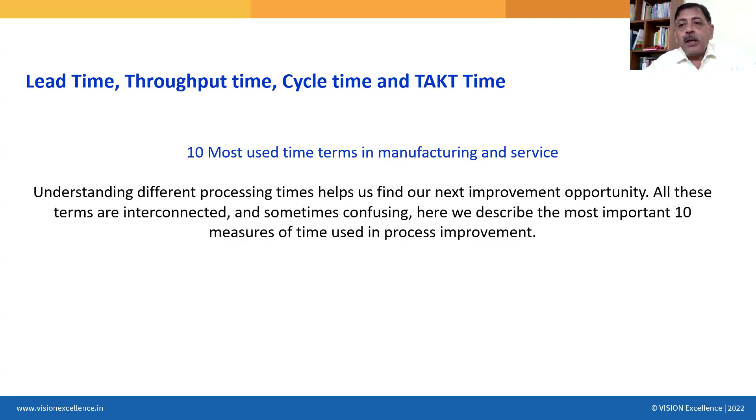Let us try and start. I will start with the very basics, and then you will realize that we are getting into some relatively complex but highly important terms. So the first is understanding the concept of open time and available time. We are starting very simple, and I will need help from some of you.

Maybe Rangaraj sir, I will need your support here. Suppose my factory opens at 9 a.m. and I close at 6 p.m. For how many hours am I open? 9 a.m. to 6 p.m. - that's 9 hours, 3 hours before 12 and 6 hours after 12. So 9 a.m. to 6 p.m. means my factory is open for 9 hours.

So what is the open time, Praveen sir? The open time is 9 hours. Okay, so Ajay bhai, my factory opens at 9 a.m., closes at 6. Open time is 9 hours.

Please also note that I already know and declare that I will be closed for half an hour for planned maintenance time - I will not be producing any sellable goods during that half hour, and also closed half an hour for lunch, where I will also not be producing anything worth selling. So that's 1 hour I already know about, and based on this understanding, I plan everything, because this is what I already know and have communicated to my whole team.

So out of these 9 hours, Ajay bhai, how much is the available time? 8 hours. Everyone clear? Show me thumbs up, who all are agreeable with this? Although I'm open for 9 hours, since I already know that the planned maintenance time is half an hour,

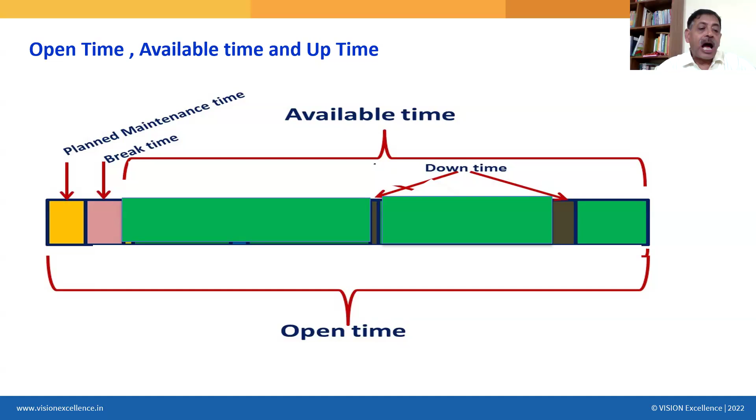So out of the total open time of 9 hours, the available time was 8 hours. And since downtime is half an hour, obviously uptime is 7.5 hours. So this is where the uptime is, this is where the downtime is. And as all of you have confirmed that you understand that the uptime is 7.5 hours.

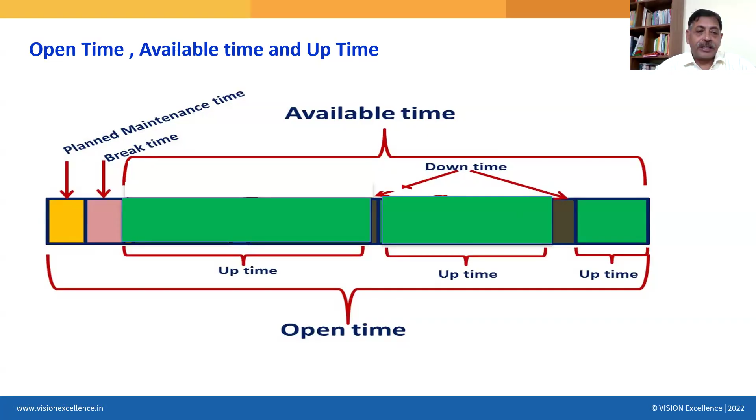Now within this uptime also, there will be some time where I know that I will not be producing anything that is worth selling. Some time is lost in setup every day. It is not a downtime. You know that you are going to heating, maybe pre-processing time.

So you set up that, right? Your chillers will come, bring the machinery to a particular temperature. Your AC burners bring the temperature to a particular level. Your air compressors will be operating and creating that particular amount of pressure in the air vessel. So, my dear friend, this yellow box is my setup time.

Unavoidable, but present. And also we realize that we will not be able to produce anything which is worth selling in this time also. And these blue blocks, my dear friends, are changeover times. Please realize that all the lean practitioners believe and agree that this setup time as well as this changeover time, although non-productive, is part of the uptime.

Show me a thumbs up who now realize that this is what the definition is, right? So for quite some time, there was a debate. Certain practitioners said that this changeover time and setup time shall be considered as downtime, but ultimately a consensus kind of emerged that although they are non-productive, they are within the uptime.

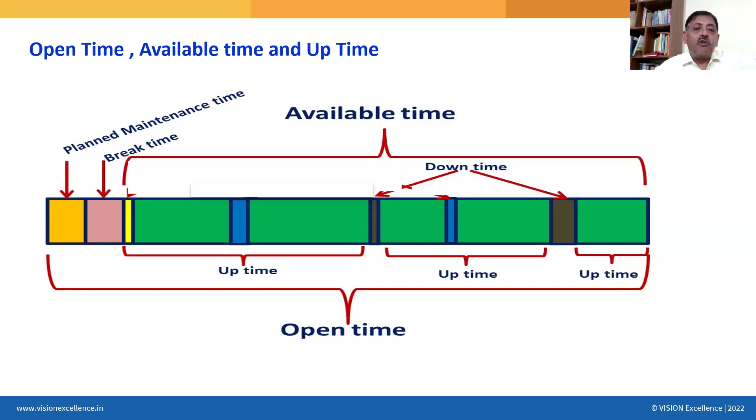Angaraja sir? Yes, sir. Shweta ma'am, show me a thumbs up if that is clear to you. So now we have understood 6 distinct definitions about open time, available time, uptime, downtime, setup time, and changeover time. This is the visual that is helping us.

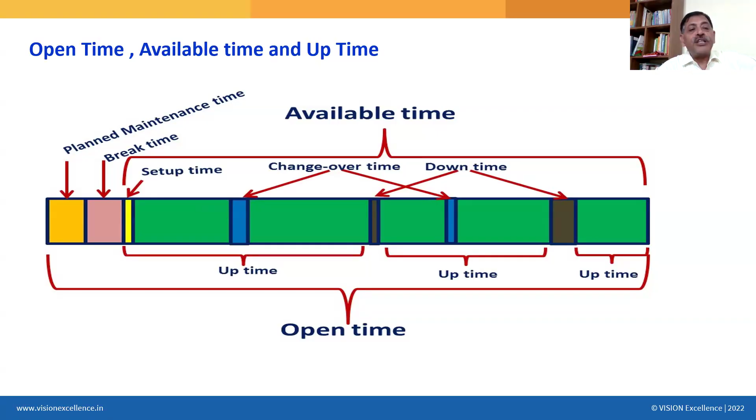So what is the open time? The official work hours, including the break time and the planned maintenance time. What is available time? It's the open time, excluding the break time and the planned maintenance time. Thangaraja sir, can you help all of us read out these 2 definitions? What is open time? What is the available time?

Open time, the official working hours, including break time and planned maintenance time. Available time, it's the open time, excluding break time and planned maintenance time. Yes, and please continue with the downtime. Downtime, the period of time in which a process is not functional due to unplanned events. Unplanned event. Yes, please emphasize on the unplanned event.

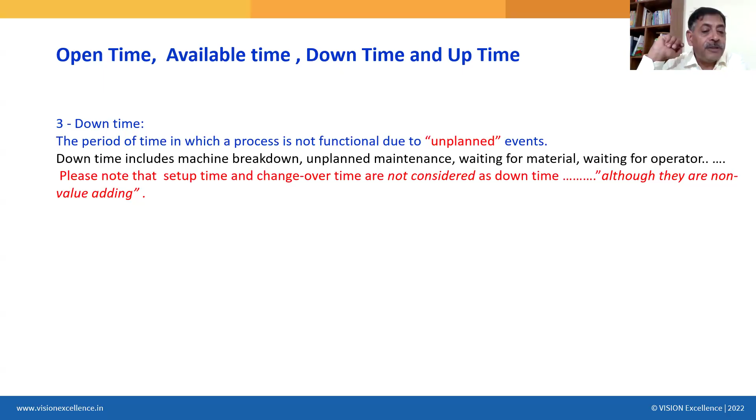We do not plan these. Please continue, sir. Downtime includes machine breakdown, unplanned maintenance, waiting for material, waiting for operator, etc. Please note that setup time and changeover time are not considered as downtime, although they are non-value adding. Show me thumbs up who all are agreeable with this. This is how the definition has been set up.

Now, uptime, the time during which the process is ready to perform its intended function. It is opposite of downtime, and therefore, by definition, it includes setup time and changeover time since they are considered as value enabling activities. Uptime obviously is equal to available time minus the downtime. Now, what is the setup time? The time required to prepare a process to be ready to function or accept a job.

Setup time is usually needed once a day at the start of the shift. For example, starting the operating ovens, setting up the chillers and air compressors, etc. It typically happens only once a day.

What is the changeover time? This is something very important. I would need help from Ajay Bhai to help us explain the definition of changeover time.

Changeover time is basically when we are changing the SKU or changing the parts, the total machine setup is done, so that we can produce a different set of product. When you're moving from one SKU to another SKU, that is a changeover.

I would like you to read out the definition because this has a very important message here. The time required to prepare a process to change product. Typically, time duration from producing the last good piece of the last product run to producing the first good piece of the next production run.

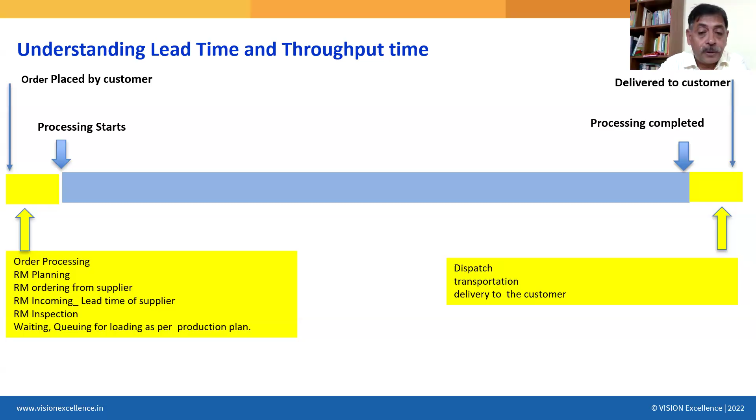So if you want to reduce the lead time - and why would you like to reduce the lead time? I will come to that in a couple of minutes. If you want to reduce the lead time, the best strategy is to reduce the throughput time. Show me a thumbs up if all of us are agreeable with that.

Now this brings us to the question, why would you like to reduce the lead time? For that I will ask a question to Natarajan sir. Natarajan sir, you want to purchase a book. Yesterday I told you I'm coming up with a book and the name is going to be Navigating to Success. And let's say after 3 months that book is available on both Amazon and Flipkart for the same price.

You go and check at Amazon, it says it will be delivered in 2 days. You go to another service, it says it will be delivered in 3 days. You go to Flipkart, it says it will be delivered in 4 days. Which service provider are we going to choose? Whichever is earlier only - yes, whichever is delivering earlier.

In other words, the service provider which has the smaller lead time. Therefore, my dear friends, lead time is, in today's day and time, the make and break feature of a business. Only those businesses are going to succeed which have smaller lead time, because typically the cost, the price, is dictated by the market.

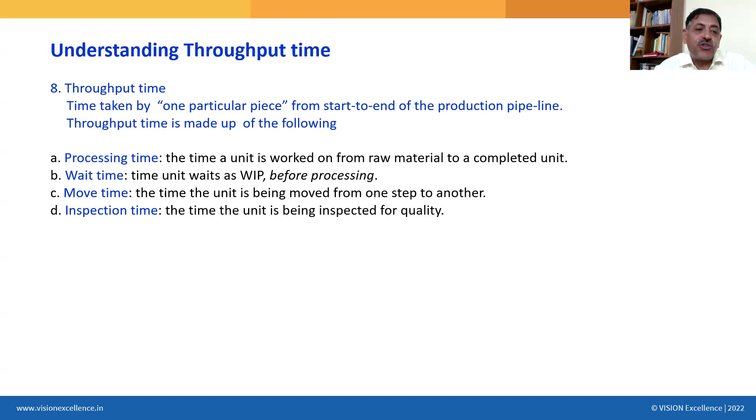Think of one particular piece. It starts moving from one end of the production pipeline. Sometimes this piece will undergo processing at machine number 1, then it will wait in the bin between machine 1 and machine 2, then take some time to move from the bin to machine 2, then spend some time on machine 2, and so on. Finally, it will spend time getting inspected. So typically these four components - processing time, wait time, move time, and inspection time - the piece will undergo.

Now that chapter is closed. Now opening a very different chapter: cycle time. Unless you give 100% attention, there is a big possibility anybody can get confused between throughput time and cycle time - these are two completely different things. Is everyone clear on throughput time? It is the time taken by one particular piece moving from one end of the pipeline to the last end of the pipeline. So that chapter is now closed.

Now opening another chapter: cycle time. Cycle time is the time required by one particular process to contribute to producing one piece of the product. It is the characteristic of the process stage. Cycle time describes your process's rate of output.

For example, if the rate of output is 60 pieces per hour - say this drilling machine, turning machine, stamping machine, or cutting machine produces 60 pieces per hour - that is the rate of output. In other words, I can say the cycle time is 1 minute per piece. So these two are related; rate of output can be expressed in terms of cycle time.

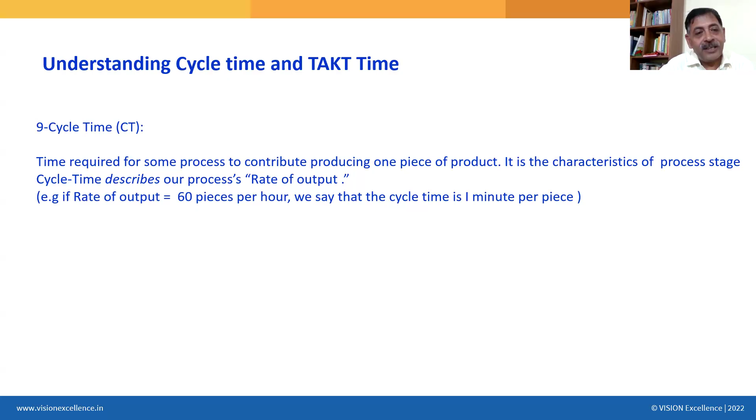Now, what is takt time? Takt time is the third concept, and it is dependent on demand. It is the rate, the speed at which your customer wants you to produce. Whether or not you can meet your demand is a separate question. But takt time can be completely determined even without knowing anything about your setup or your machine, because this is completely defined by what the customer demands.

Now, let us try and visualize, it will become very simple for all of you. Please come on camera. This is something very interesting and can be quite confusing if you are not 100% immersed into the discussion. So this is how typically a process happens. There is operation 1, this is my manufacturing pipeline. Ajay bhai? Yes, sir. Praveen bhai, this is my Ramachandran sir. Suvarna sir, this is my manufacturing pipeline.

This is how operations typically happen: there is operation 1, then goods will be waiting in the WIP bin, then they will be moved to operation 2, then waiting in the next WIP bin, then moved to operation 3, then waiting in the WIP bin for inspection, and inspection happens. This is how a typical manufacturing setup typically is. I request all of you to please come on camera, this is something very, very interesting. Okay, perfect, I can see a lot of people now, wonderful.

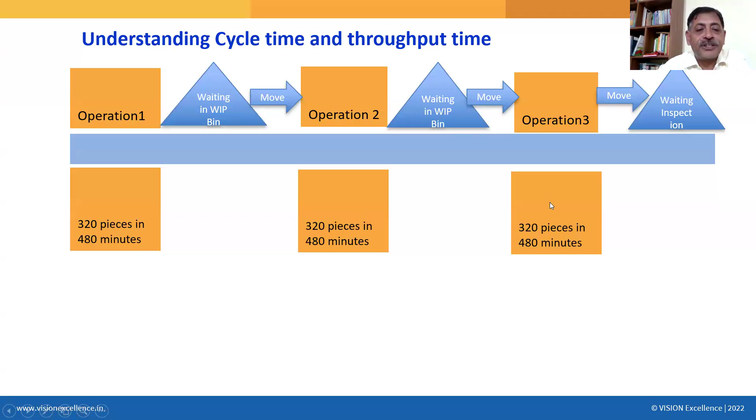Now let us assume there is a WIP bin. I have designed my process in such a manner that this WIP bin is for 50 pieces. Now let us play a small game.

It is very, very simple, child's play. If this machine throws out one piece every 1.5 minutes, how much time will it take to fill this bucket of 50 pieces? 50 multiplied by 1.5. 75. Yes, very correct, very simple, child's play. So how much time will it take to fill this bin?

And I move this bin only when it is completely filled. So one piece, every piece, is spending 1.5 minutes here, and it is spending 75 minutes here in this bin.

Yes, and we can convert how many seconds are there. Then it takes 20 seconds to move there. I can have another situation also.

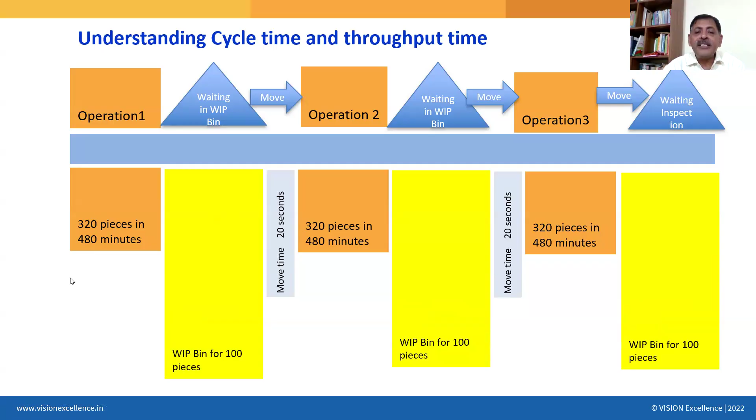Maybe I can decide that instead of 50 pieces, I will have a bin for 100 pieces. I can decide that, it's possible. But I have decided I will have this bin for 50 pieces only. So this is the set. This is how the setup is.

So the cycle time here is 1.5 minutes, because the rate of output is 320 pieces in an 8-hour shift, for 480 minutes. Cycle time for operation 1 is 1.5 minutes, that is 90 seconds. That is, every 90 seconds the operation produces one piece. Please show me a thumbs up if all of us are following this simple concept.

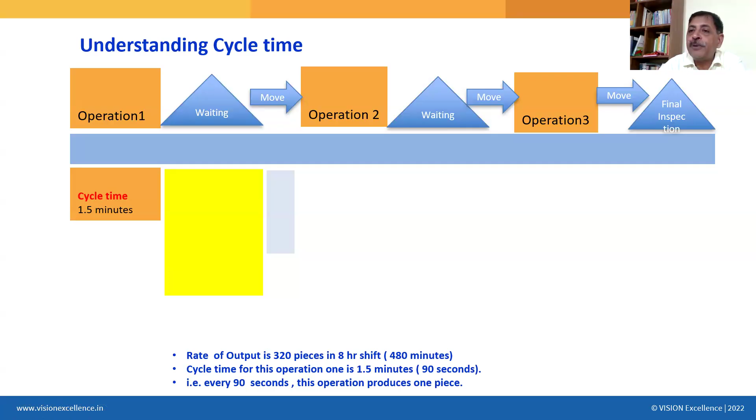Okay, now the WIP bin is for 50 pieces. It can be for 100 pieces also, whatever you decide. I am intentionally showing you this to demonstrate how these WIP bin sizes affect things, and what they do not affect. For the moment, just know I can decide to have a WIP bin for 50 pieces, or 100 pieces, or 200 pieces, or 20 pieces, whatever.

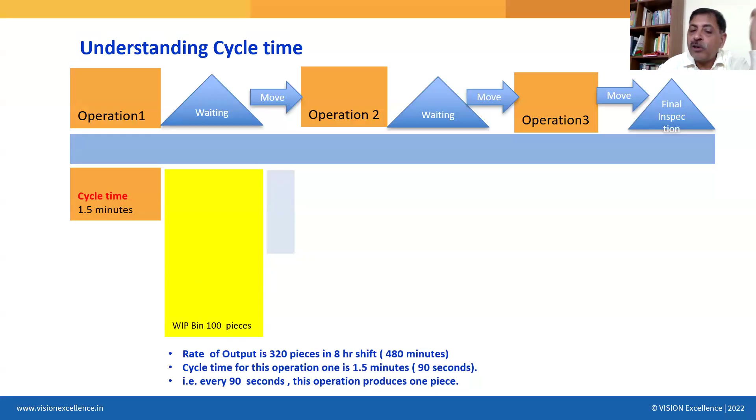For the sake of simplicity, in this example, the cycle time for operation 2 is also 1.5 minutes, and so on. So this is how one particular piece is going to spend its time.

Let's calculate the throughput time for one particular piece. What are we going to calculate? Throughput time. What is throughput time? The time it takes for one particular piece to travel from one end of the pipeline to the last end of the pipeline.

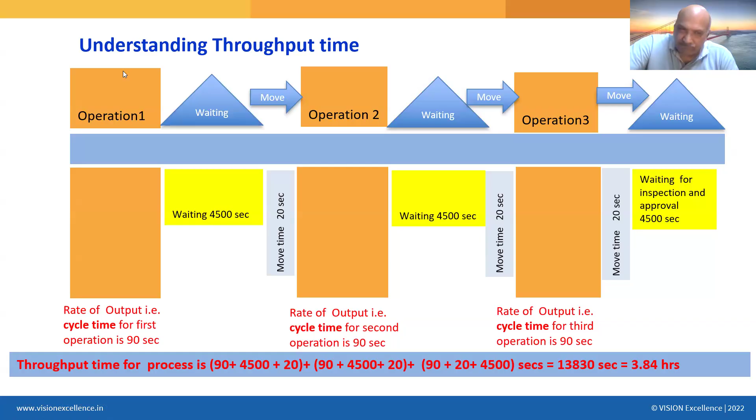So this particular piece will spend how much time here? 1.5 minutes, 90 seconds. How much time will it spend here? 75 minutes, which when converted is 4,500 seconds. So 90 seconds it will spend here, 4,500 seconds it will spend here, 20 seconds it will spend here. Again 90 seconds here, 4,500 seconds here, 20 seconds here, and so on.

Can you help me calculate? 75 minutes multiplied by 60 is 4,500 seconds. So if I want to calculate the throughput time for one particular piece: 90 plus 4,500 plus 20, which equals 4,610, and this is happening thrice, so totally 13,830 seconds, which is 3.84 hours.

One piece will take 3.84 hours for moving from this point to the output point of my production pipeline.

Show me a thumbs up if this concept is understood. Shall I repeat? Very simple. So, my dear friends, this is how I calculate the throughput time.

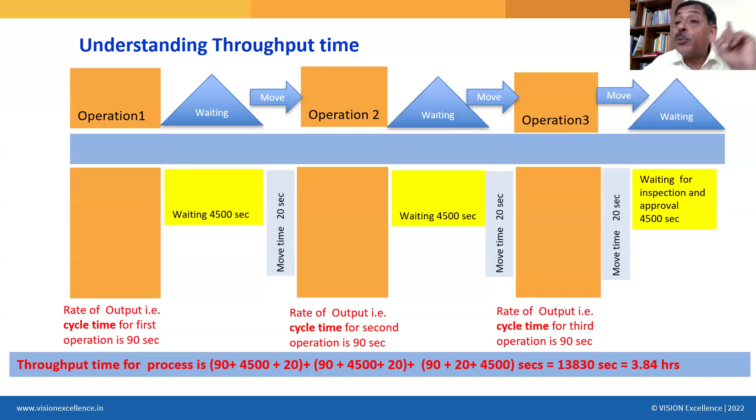Okay, so now coming back to my core presentation. My dear friends, now all of us are agreeable that we want to reduce the bin size for the sake of reducing the throughput time. Please show me a thumbs up. And please also note that this bin size has got no impact, none at all, on the cycle time. Correct? Is that clear? There are other ways, other strategies, other ideas we can use to reduce the cycle time. We will definitely want to increase production, reduce the cycle time, but that is a different story altogether.

Okay, now coming to this. Let me see how much time the piece is actually getting worked upon, and all the other time is a kind of resting, idling, or waste for this particular piece. This particular piece is being worked upon only for these 90 seconds. Only this 90 seconds, yes, not here. It is just waiting here also, nothing is happening to it. So 90 seconds here, 90 seconds here, and 90 seconds here. These 90 seconds thrice, that is exactly what your processing is happening. Fact number 1.

So processing time is 90 seconds plus 90 seconds plus 90 seconds, 270 seconds only. Also, third concept: if this machine is throwing out pieces when the pipeline is full, now assume the pipeline is full. After 2 hours, let's say the pipeline is full. This machine is throwing out one piece every 1.5 minutes. This bin is also throwing out one piece every 1.5 minutes. This machine is also throwing out one piece every 1.5 minutes. This bin is also throwing out one piece every 1.5 minutes. Your last bin is also throwing out one piece every 1.5 minutes. So if you look at the output side of your production pipeline, it is throwing out one piece every 1.5 minutes.

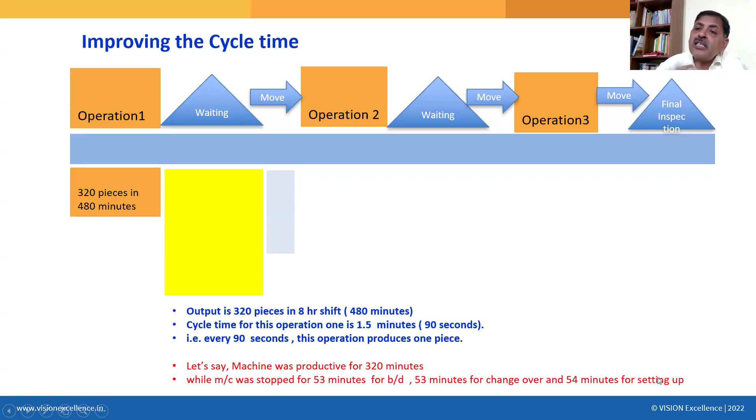I looked at this machine, I studied this, and I observed that this machine was productive only for 320 minutes, while the machine was stopped for breakdown for 53 minutes, 53 minutes for changeover, 54 minutes for setting up. So actually this machine was working only for 320 minutes. And if I think about it, for every minute it was working, it was giving me one piece. Unfortunately, it was not working because of the breakdown, because of changeover, because of the setup - that time was lost.

So if I want to increase the output from this machine, what shall I do? Very logical - shall I try and eliminate the changeovers? Shall I try and eliminate the breakdowns? So suppose if I am able to make sure that this machine is having no breakdowns, no changeovers, then the output will be increased. Yes, then maybe for every 480 minutes, it will be giving me 480 pieces.

Yes, and therefore cycle time will be improved. So for improving the cycle time, when I say improving the cycle time, it means reducing the cycle time. For improving the cycle time from 1.5 minutes to 1 minute, what shall I be attempting? Shall I be looking at the bin size? No, bin size has got nothing to do with it. What has got to do with this is the breakdown time, the changeover time, the setup time. We will have a look at this. So very simple, look at this.

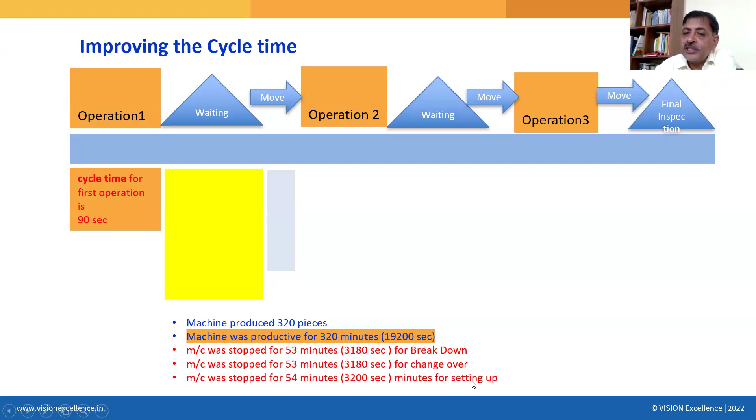Cycle time for this operation, in this particular case, is how much? This machine produced 320 pieces. The machine was productive for 320 minutes. The machine was stopped for 53 minutes for breakdown. The machine was stopped for 53 minutes for changeover. The machine was stopped for 54 minutes for setting up. So the meaning is the machining time is only 320 minutes, and in this machining time, the machine produced 320 pieces. So as far as the machining processing time is concerned, it is taking only 60 seconds per piece.

Ajay sir, Praveen sir, Sir. Suvarna, Naresh sir, Natarajan sir. Yes, machine processing time is 60 seconds per piece. And for every piece, 10 seconds, let's say this is for the sake of simplicity, 3,200 seconds. Right? Sir.

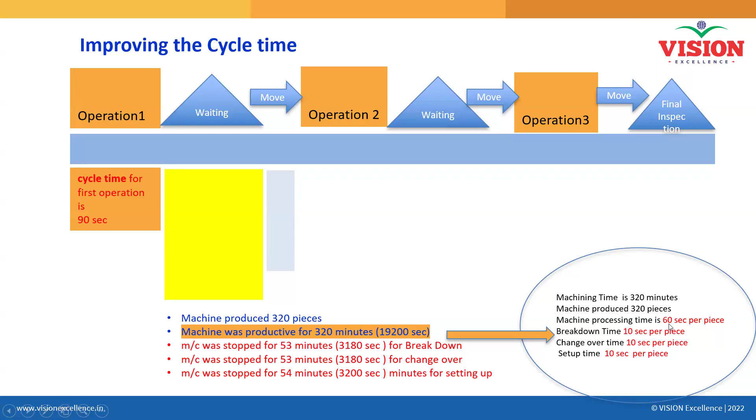10 seconds per piece it is. 10 seconds per piece are lost in breakdown, 10 seconds per piece are lost in changeover, and 10 seconds per piece are lost in setup.

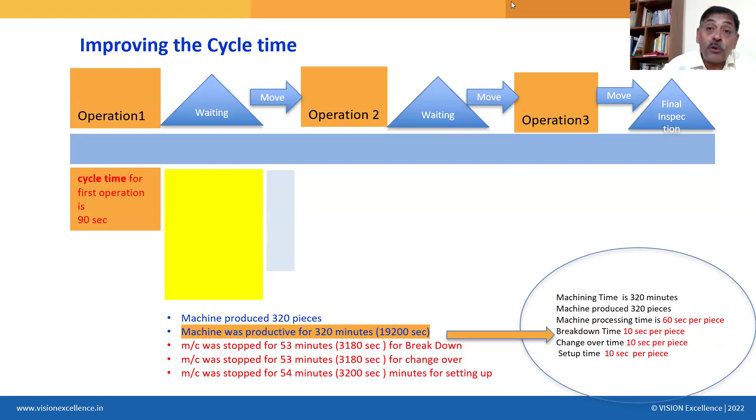And therefore, sir, the question is: for a system, either in FMCG, how many shifts' output should be checked ideally? Ideally, you need to monitor for 3 days, 3 shifts, 9 shifts, and then only you will have an average understanding. Because every shift, the same amount of breakdown will not happen. But if you monitor for, let's say, 9 different measurements spread over 3 days, or spread over 9 days if you are working only one shift, then it gives a kind of representative picture.

So how much is the typical changeover time? How much is the typical breakdown time and so on? So now we have realized, my dear friends, a very interesting fact: if I want to improve, that is reduce the cycle time, I shall be focusing my efforts on reducing the breakdown time, reducing the changeover time, reducing the setup time.

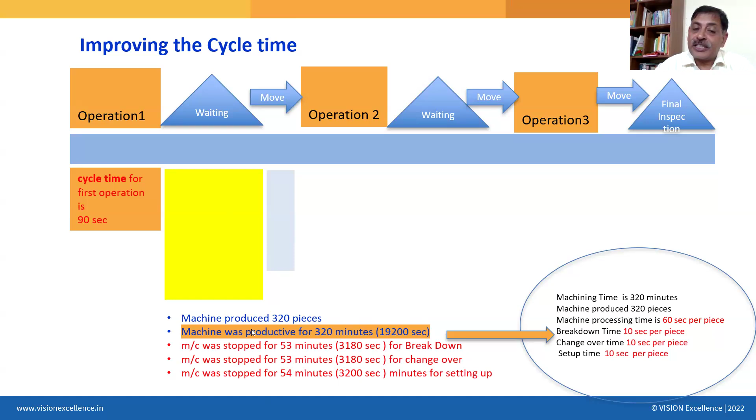Is that clear? And if I want to reduce my lead time, that is throughput time, I shall be focusing on bin size. So it will improve the cycle time also. Cycle time is getting impacted only because of these things, yes, only these things.

No, it is not at all affected by the bin size. I'm not talking about bin size, I'm talking about this operation. If we remove this breakdown, changeover, and setup time, then cycle time will improve, and parallelly our throughput time will also improve. It will also be reduced, but very marginally. You will see, very marginally.

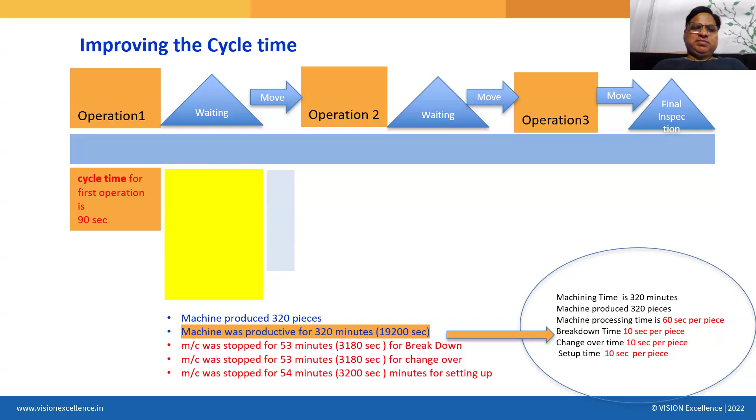Because it is 90 plus 4,500 plus something. So you reduce that 90 to 60. Right? You remember that equation? Let's come back to this: 90 plus 4,500 plus 20. So suppose you make an improvement here, instead of 90 it is now 60.

Yes, but the impact is there, of course, but very small, kind of insignificant on the throughput time, but significant impact on your output. Is that clear?

Can we calculate? Let me stop sharing and come back to my Excel sheet to explain. So let's say this was my original scenario: 50 pieces bin size, and therefore it was 3.84. Remember that? Now I do not make any changes in this 4,500 bin size, remaining the same. Let's improve the cycle time. Instead of 90, it is only 60 now. Let us see how much it impacts. Only 3.81. From 3.84, can you see, to 3.81.

Very insignificant. So there's no real point in getting happy thinking there are other reasons by which you'll become very happy, because reducing cycle time is also very, very beneficial. Very, very beneficial because your output increases. But it has, in a manner of speaking, no impact on throughput time. I can say bringing it down from 3.84 to 3.81 is no impact at all. There are other benefits though: your productivity has gone up 1.5 times. So instead of every day making 320 pieces, you are now making 480 pieces.

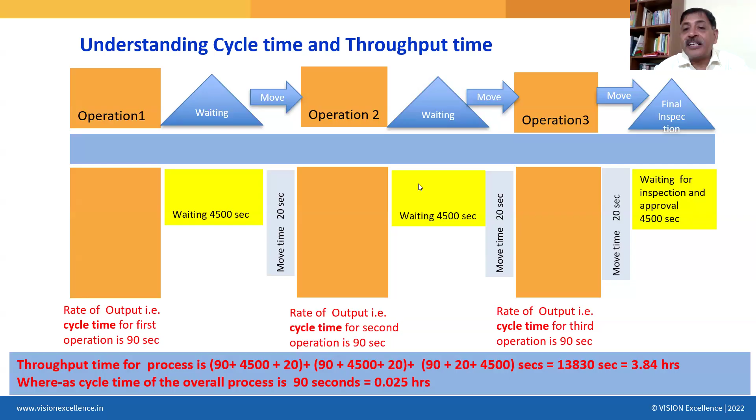That is a different characteristic altogether, and you want to improve both. So you will work on reducing the batch size, as well as reducing your cycle time. But please remember, these are two different characteristics. Let us not confuse them, and most people, even senior people and academicians, at times get confused between these two.

Sir, is there any possibility that the throughput time will be lesser than the cycle time, in any case? You see, these are two completely distinct characteristics, fact number one. But just for the sake of it, let me tell you that whatever you are asking is not possible. Why? Let us come to this.

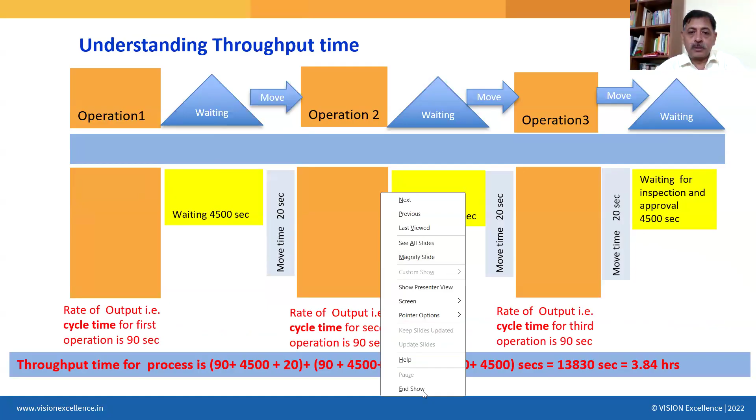You want to compare the cycle time and the throughput time. Let me share once again and show you how that happens. So for your case, let's say you want to reduce the cycle time and compare. Suppose I eliminate this, and I eliminate this as well. Okay, there is only one operation of cycle time, that's all. It is equal to throughput time. As simple as that, right?

No. This particular piece will spend 90 seconds here, and 90 seconds here, and 90 seconds here. So throughput time in any case will be 90 seconds plus 90 seconds plus 90 seconds. While the cycle time for this machine is 90 seconds.

This operator will say, sir, my cycle time is 90 seconds. This machine will also say my cycle time is 90 seconds. And this one too will say my cycle time is 90 seconds. But one particular piece will have to spend 90 seconds here, 90 seconds here, and 90 seconds here.

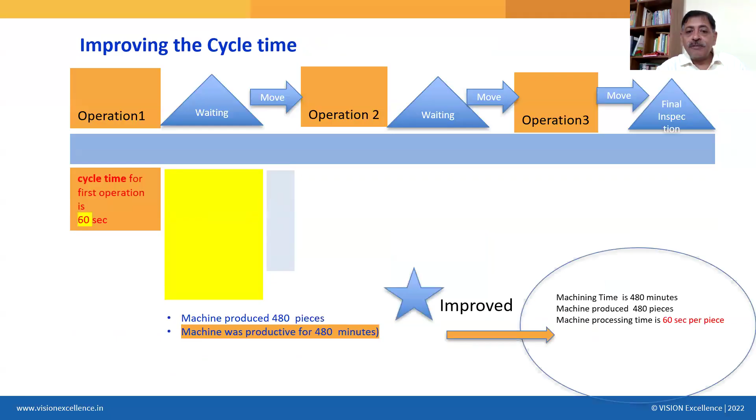Suppose this is a situation where this machine is throwing out one piece every 1.5 minutes. And this machine is capable of—listen carefully—throwing out one piece every 1 minute. But will it be able to? It will not, because it is only getting a piece every 1.5 minutes. So this machine will be starved.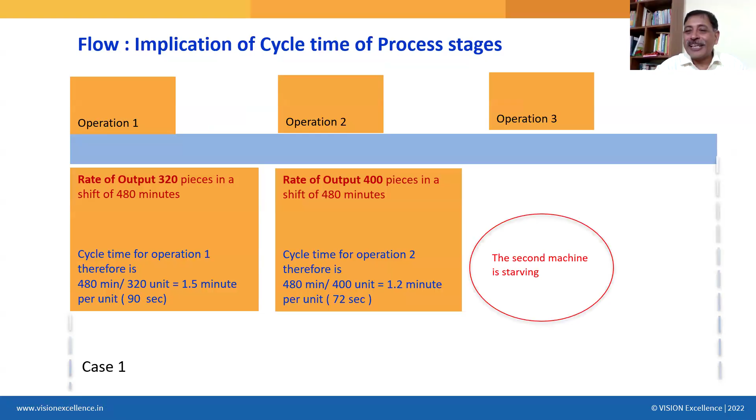Is that clear? This was case 1. Everyone clear about this? Let us take case 2.

Both these situations are undesirable. Therefore, isn't it a good idea to make sure that the cycle times of every process stage are more or less the same? Simple. Angaraja sir, do you agree with this?

So this situation is bad. Therefore, one clue is that to have a smooth flow in the process—establishing flow, creating flow—is one of the principles of lean. We must calculate the cycle time of each and every machine and try to find ways by which the cycle times of each process stage are more or less the same. Otherwise, flow cannot be there. Do you all agree?

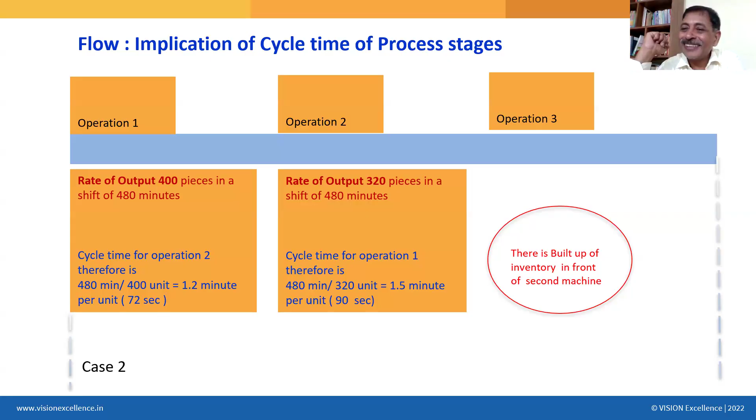Simple. Now, with this, let me check this. So this is a situation where this machine has a cycle time of 1.2 minutes—480 minutes, 400 units, 1.2 minutes per piece, 1.5 minutes per piece. Here also, this machine is capable of 1.2 minutes. What is the overall cycle time for my whole setup?

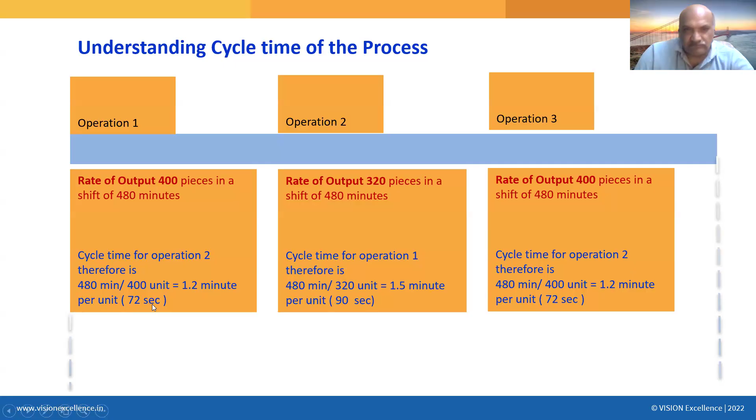This machine, Operation 2. So now onwards, when we are doing VSM, that is value stream mapping, how will we identify the bottlenecks? The machine which is having the highest cycle time is the bottleneck. Show me a thumbs up. Very simple concept. So now we have learned a very practical way of identifying where the bottleneck is.

Calculate the cycle time of each and every machine individually. I told you that the cycle time is a characteristic of each process stage or every machine. Then find out which machine or process stage is having the highest cycle time, and that is your bottleneck.

Then the next logical step: you want to balance out first because you want to have flow. So what is the trick available to improve, that is reduce, the cycle time here? Will we succeed if you look at the WIP bins? No, we will not, because cycle time is not impacted by that. We demonstrated that. So how will it be impacted? What impacts this? Breakdown time, changeover time, setup time. So if we look at this, we can improve, that is reduce, the cycle time there.

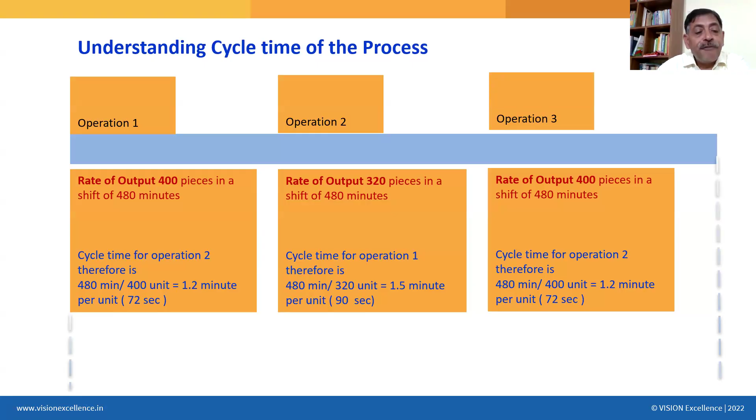Now this brings me to another interesting concept, which is known as the takt time. Till now, everything okay? Please show up once and confirm that till now everything is digestible.

Simple. Okay, perfect. So now we have understood throughput time, lead time, what impacts throughput time, what is cycle time, what impacts cycle time, why we want to reduce the throughput time, because we want to reduce the lead time. Why we want to improve and reduce the cycle time? Because we want to increase the output, the rate of output. So instead of 320 pieces, we want to make 480 pieces. That is the impact of cycle time.

And how to improve that and reduce the cycle time is by reducing the machine stoppage time. And as I told you, machines get stopped because of breakdown. Now listen to me, I am deep diving into this. Machines not only stop because of breakdowns. I have spent 35 years in industry. Machines stop because of breakdown.

Machines stop because of non-availability of raw material. Machines stop because of non-availability of competent manpower. Machines stop because of quality assurance approvals. Machines stop because there is no electricity. Machines stop because nobody thought it was important to keep it running. They take it lightly. Machines stop because of various many easy-to-solve reasons also. Machines stop because there was no drawing provided to the operator and he was waiting for the specifications. Machines stop because the measuring equipment was not provided to the operator so that he can make sure the piece he is turning has been turned to the correct dimension.

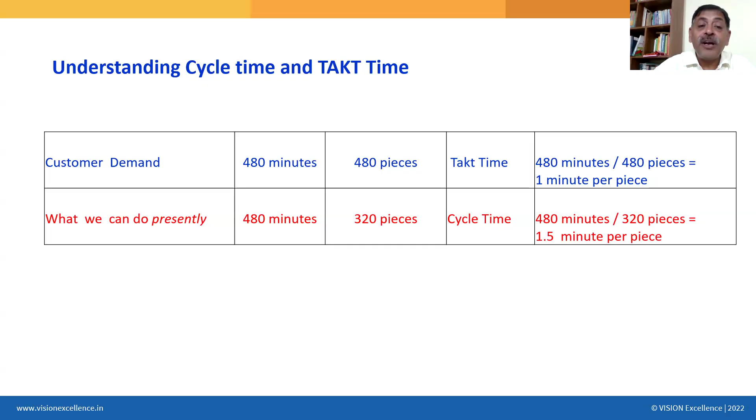What is the area where we will be focusing? Breakdown time, changeover time, setup time, machine stoppage time. By addressing that, we will be reducing our cycle time so that we are then able to meet demand. Therefore, the crux of the whole discussion, starting from that very simple concept of factory opens at 9 a.m., closes at 6 p.m., we have now reached a very complex and very important conclusion: cycle time should be less than or equal to takt time.

Okay, so that is all from this side. Now let's move to VSM, value stream mapping. Because for understanding VSM, all this basic vocabulary is going to help us a lot. If you have understood all this, the concept will become very, very simple to understand. So are we ready to jump to value stream mapping? Okay, perfect, let us.

Okay, so value stream mapping. Typically what happens when we talk of value stream mapping is also nothing but a kind of process mapping. All of us have one way or other been into process mapping, process flow diagrams. It is one of the 7 basic QC tools. Hope you remember what are the 7 basic QC tools as told by the Japanese in the Toyota production system: your process flow diagram, your scatter diagram, your cause and effect diagram, and so on.

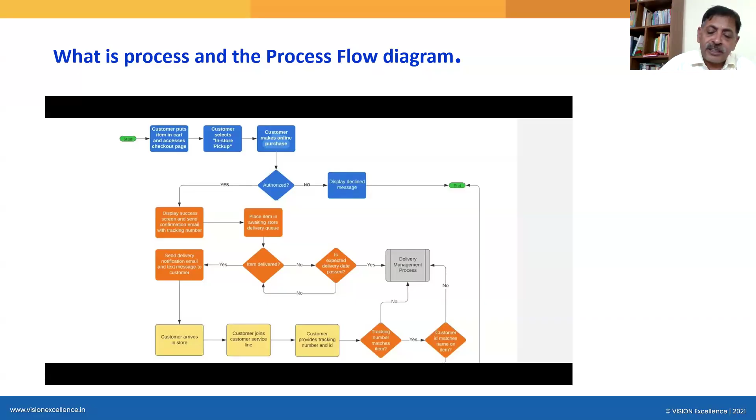So the most simple process flow diagram, whenever as professionals we try to understand what is happening in a process, we draw a process flow diagram or a process map. This is typically how a process flow diagram looks like, and it can be created for any business scenario, not only manufacturing. For that matter, I have created this process flow diagram for an Amazon-like business setup, Amazon and Flipkart.

So this is what happens: the customer—for this I typically created it for one of our customers who are supplying to Target Inc. of the US. So what happens is that Target of America has various big stores, just like IKEA has in various different cities. People go and book their orders, and at times they pick up from the stores. At times things get delivered to their homes, and at times they go to the in-store service. So this is one typical process flow map.

So the customer puts an item in the cart, then the customer selects in-store pickup, then the customer makes an online purchase, then whether that is authorized.

If yes, then it goes to this process stage. If no, then a decline message is sent to the customer and the process ends.

If it is yes, then we display the success screen, send a confirmation email with the tracking number, then place the item in the awaiting store for delivery queue. Then we ask ourselves whether the item is delivered. If no, we check the delivery date. If yes, we send the delivery notification, and so on.

So this is one process flow map. Intentionally, I have taken a relatively complex, relatively different process flow map, because typically we see process flow maps in manufacturing setups: raw material incoming, raw material checking, going to cutting, going to drilling, and so on. But I want to emphasize that process flow maps are equally applicable and useful for any type of business scenario like this. So they are very useful.

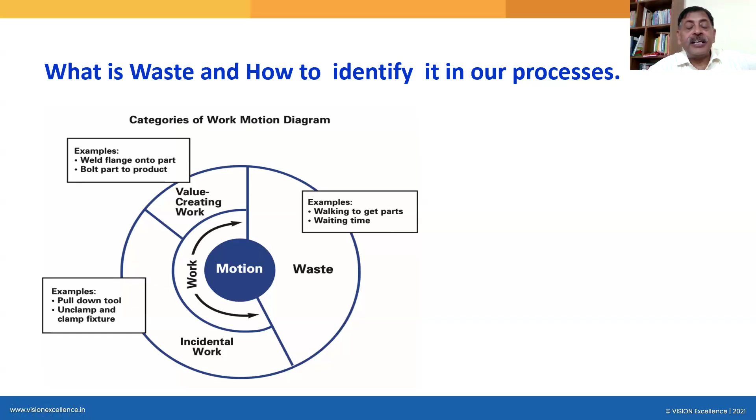So primarily speaking, all the activities can be classified into three distinct categories. One, value adding activities. Another, non-value adding but necessary activities, like clamping, unclamping, and inspection.

And there will be certain non-value adding activities. So if we are able to identify the non-value adding activities, or the waste, we shall be working towards eliminating those. Non-value adding activities shall be minimized, and value adding activities shall be focused upon. So the focus of lean methodology is on eliminating the non-value adding activities.

What is a value-adding activity and what is a non-value adding activity? A value-adding activity is an activity which physically changes the nature or shape of a product or service towards what the customer wants. Only that is a value-adding activity.

Now, suppose this is a piece of metal. I want to drill a hole, and the customer wants a hole in this particular piece. So by the time this drill is removing metal from this piece, drilling a hole, that only is a value adding activity. This activity — when I bring it up, clamp it here, move my tool from this mounting location through thin air — till this point is a non-value adding but necessary activity.

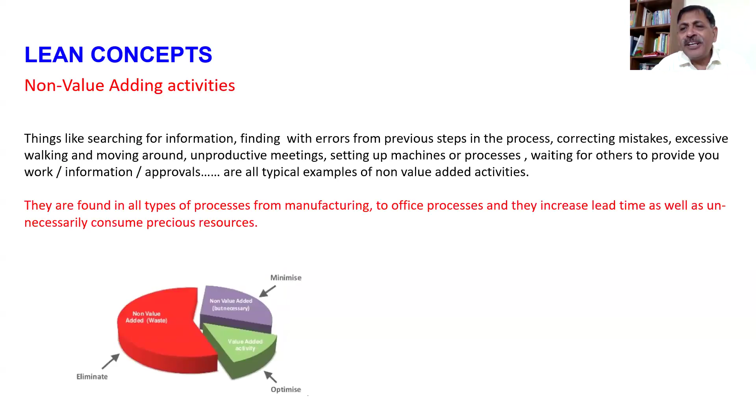So there are 4 different filters through which we identify whether a particular activity is value adding or non-value adding. Non-value adding activities include waiting, breakdowns, etc.

There is also the 3M concept, called Muda, Mura, and Muri. It is not only about elimination of waste, it is basically elimination of wasteful activities. There are 3 types of wasteful activities known as 3M: Muda, Mura, and Muri. Muda means wastefulness or uselessness. Mura means unevenness or non-uniformity, and Muri means overburden.

In lean, we learn to eliminate all these wasteful activities, and all these become very apparent. Here is a quick overview of the 8 wastes: transportation, inventory, motion, waiting, overproduction, overprocessing, defects, skills. A popular acronym is TIMWOODS, another popular acronym is DOWNTIME, another is WORMHOLE. These 8 big wastes help us identify where the wasteful activities are and how we should go about eliminating them.

Now coming to lean specifically, this is the 5-step lean implementation methodology. Step number 1, we define value. Step number 2, we map the value stream. This VSM, or value stream mapping, is such an important core concept for lean and TPS. So what we are going to learn is value stream mapping. Then we want to create flow, establish pull, and then keep pursuing perfection. So this is the 5-step lean methodology.

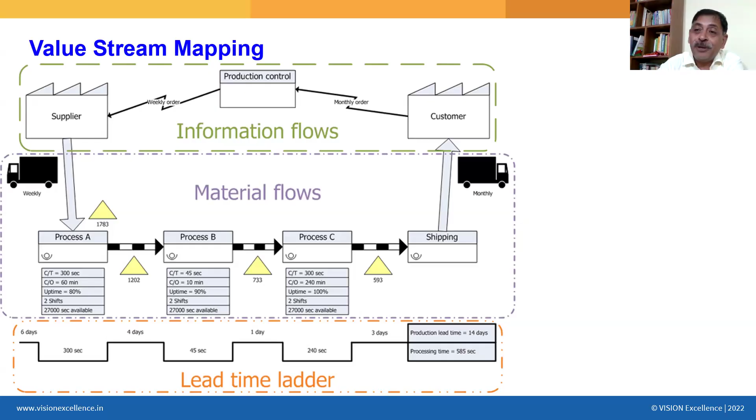Show me a thumbs up if you are clear about the benefits that this approach of VSM gives us. Till now, we are happy by drawing our process flow diagram, colorful diamonds, stars, and processing stages. But now this is giving us an X-ray and MRI of what is really wrong or what can be improved in our process.

And this is a typical way of creating a process flow map, a VSM. So please note that there will be a present state and there will be a future state. There will always be three blocks: one for the information flow, one for the material flow, and one known as the lead time ladder. We have understood all these concepts, so I will not spend too much time here. This is the example we are seeing, and these are the simple notations, the symbols.

The process is denoted by this, customer supply is denoted by this. This is how a data box looks like. This is how a work cell looks like. This is a symbol for an operator. This is a symbol for material pull. This is a symbol for truck. Push arrow is like this. FIFO is like this, load leveling is like this. Kanban post is like this.

Today we do not have the necessary time to discuss what is Kanban, what is a pull system, what is a push system. If you people are interested, you can enroll for the Lean Champion course. But of course, these are very common concepts. So with this, this is exactly what we do.

So let us try and calculate with the help of a volunteer. Maybe Natarajan sir, in this example, let us calculate. First, calculate the lead time, or the throughput time.

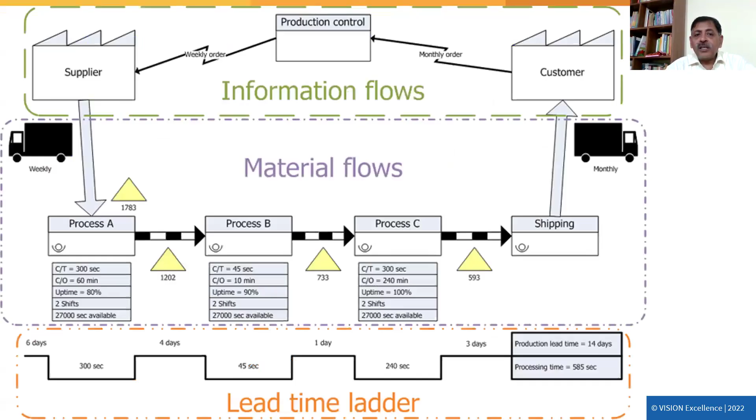And then this is what we have as the present state. So this is my present state. Then let me see what improvement I can make. So I will spend another 4 or 5 minutes on this, then we will be done with the value stream map.

If this, my dear friends, is my present state or the current state value stream map, let us have a look at this. Obviously, as I discussed, there are 3 blocks: one is for information flow, one is for material flow, and one is your lead time ladder. The information obviously is flowing from the customer to the production controller, from the production controller it is flowing to the supplier, then it is coming to the

material flow. So this is where the lead plates manufacturing happens. Then this is where, at process stage number 2, plates curing and drying occurs. Then material is moved to the battery assembly. Then the material is moved to battery charging. Then material is moved to shipping. And between all these process stages, there is inventory.

Now let us create the data boxes. For this, the cycle time is 4 hours. The lead time is 6 hours. What is C&A? C&A is complete and accurate, what we call as yield, percentage of yield. So we have created data boxes for all this.

Here, can you tell me how many operators are there? 4 operators. Here, 4 operators. Here, 2 operators. Here, 2 operators. Here, 2 operators.

And so on. So if I calculate, can I make my lead time ladder here? Yes, I can. So 4 hours is spending here, then 6 hours is spent in waiting, 26 hours is spent here on processing. So this is how I can calculate my lead time.

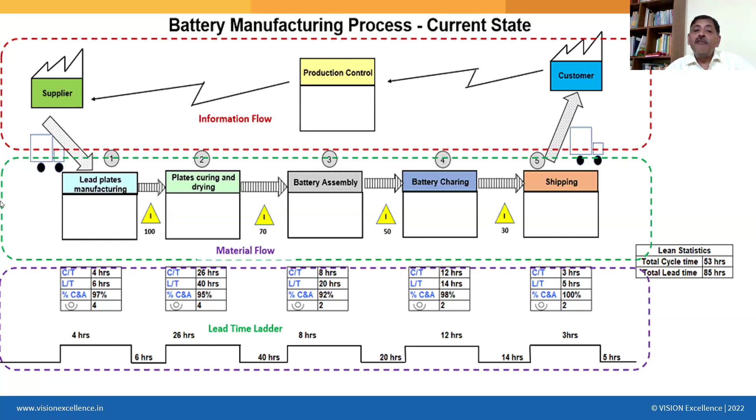Similarly, this 26 hours is too high. It is not letting things balanced. So we must focus our attention here. So can you see, when you draw this map, it is not only telling you what is happening, but it is also telling you where we need to work.

Okay, and that is how we plot this as improvement opportunities. So one improvement opportunity is here, reduce the defects. One improvement opportunity is here. We saw that why it is taking 26 hours for plate curing and drying, because of unnecessary transportation of the plates.

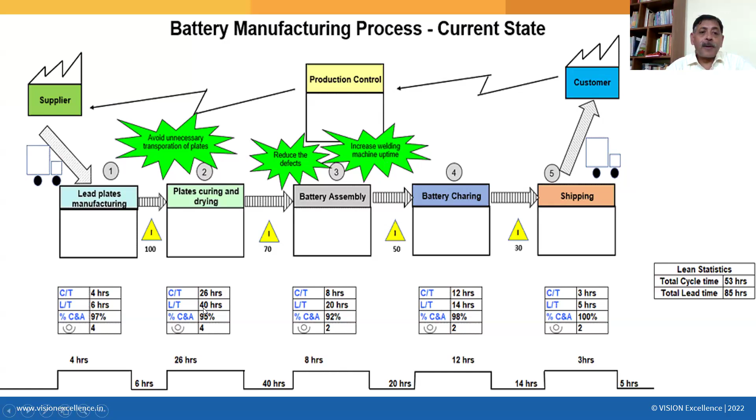Here also we identify, so the welding machine uptime can be improved, because you can see the uptime was a challenge. Okay, and then once we achieve that, from 26 hours it was brought down to 10 hours. From 92% it was brought up to 98%, and so on. And therefore now it is a much more balanced, and more likely to meet the customer demand.

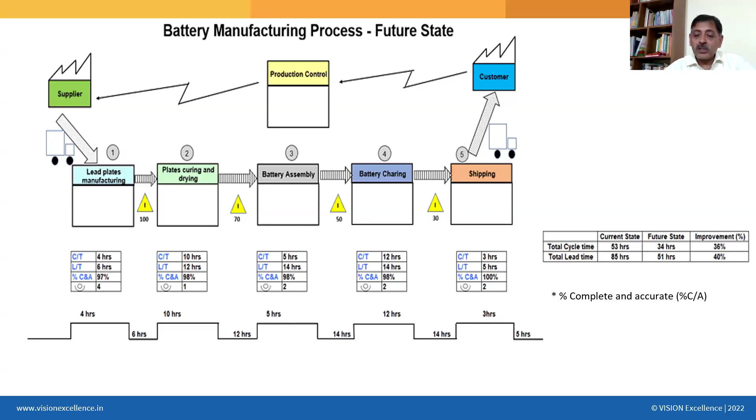This is how your things happen. And if you want to have a look at some real life examples, how this actually happens, visit my LinkedIn profile. I keep conducting value stream mapping, and I keep posting articles and photographs of those, and I will be sharing maybe a couple of them with you.

So then you plot all this on a Yamazumi chart. What is value adding, what is non-value adding, and based on that you realize that okay, this is the particular operation which is not meeting the takt time. So you identify what are the non-value adding activities, and then you reduce the cycle time over here.

So that was kind of a comprehensive coverage. I would just like to take you to my LinkedIn profile. Let me share a couple of examples.